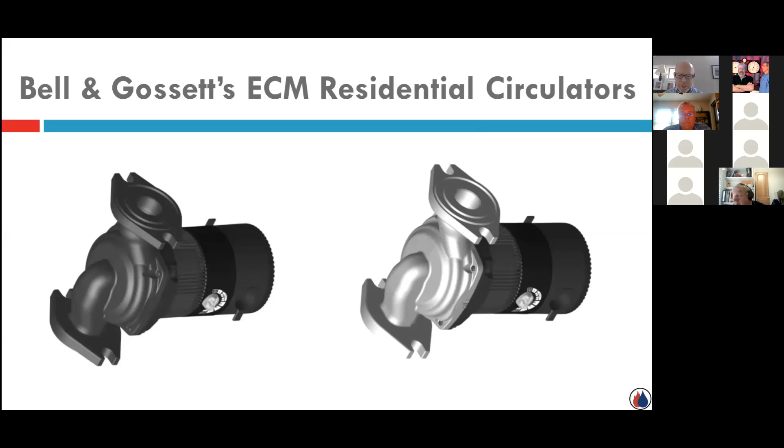ECM, why? Picture of B&Gs, little residential circulators, both cast iron and stainless steel, for domestic hot water or hydronics applications. They also have a family of commercial circulators, both single phase, and they actually introduced, I think they're the only manufacturer right now in the market that offers a 3-phase model of ECM pumping for their light commercial or commercial circulators.

So a quick question, why high efficiency? What's the reason? What's wrong with this? This was a typical residential home for a long time, all throughout the country, specifically up here in the Northeast, New England, New York, New Jersey, etc. 2, 3, 4 zones, 2, 3, 4 zone pumps, 3-piece, old B&Gs, probably looks like maybe an atmospheric gas boiler.

And that's what we did for a long time, and everything worked. Relatively speaking, it worked. Now, was it the most efficient way of doing it? Absolutely not. But for years, that question was never asked.

But efficiency and energy usage and energy costs have all moved onto the radar screen over the last few years, probably even more so when you think about condensing boilers. It's probably been 10, 15 years. The industry's changed, and it's looking to heat the water as efficiently as possible.

And then the next question became, are we circulating? Are we distributing that heated water that we heated efficiently? Are we circulating it as efficiently as possible? And when you get into the details, clearly not. That was okay for years, but now the focus is on high efficiency.

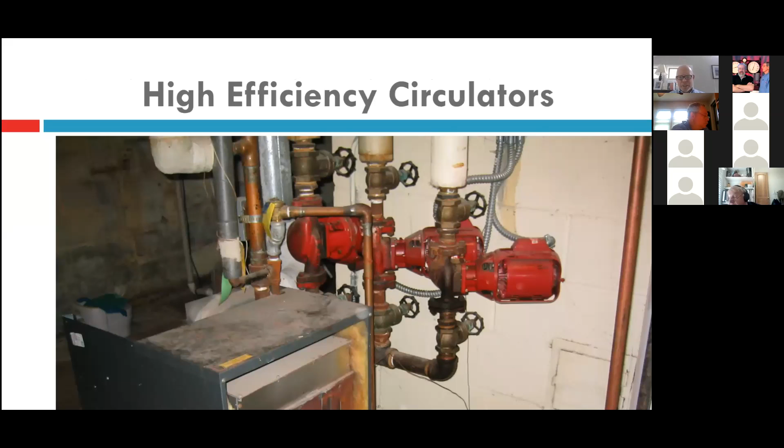Where does it come from? Well, a lot of the things that happen in the hydronics industry seem to originate from Europe. An interesting factoid: residentially speaking, over in Europe, they heat their homes about 98% hydronically. They'll have a boiler of some source, and even those boilers are starting to move to an air-to-water heat pump, but they're using hydronics. They totally believe in using water as the method of delivering energy from the heat source out to the terminal units, out where the people are.

Almost 15 years ago now, the pump manufacturers in Europe got together and asked, are we doing as good a job as we could, efficiency-wise, in terms of what's sometimes called wire-to-water efficiency? How much electricity am I using, and how effectively am I using it to circulate and deliver the water out to the terminal units? They voluntarily started this, but they knew legislation was coming from the European Commission that was going to increase the efficiency standards of these circulators.

So they created this thing called an EEI, Energy Efficiency Index, and rated the various classes. They created an alphabet scale, A through G, as shown here, and they were trying to get into this A, or A asterisk, or even A double asterisk. They started this a while back, so they've been using it for quite a while. If you look at an ECM circulator compared to, say, a water lubricated PSC, a permanent split capacitor, wet rotor pump that we've been using for the last 35, maybe 40 years...

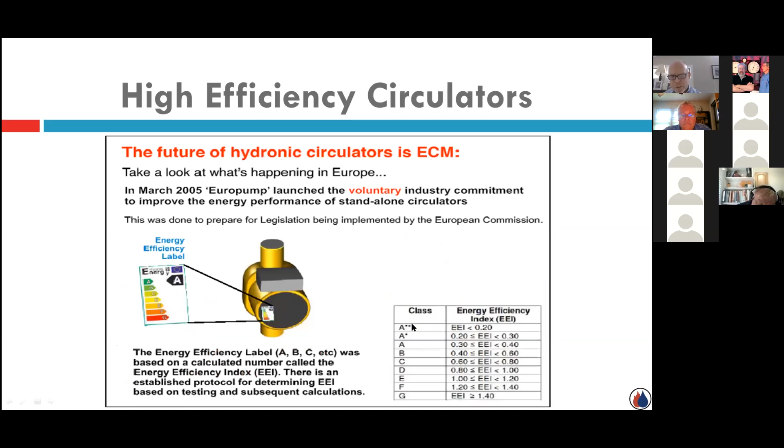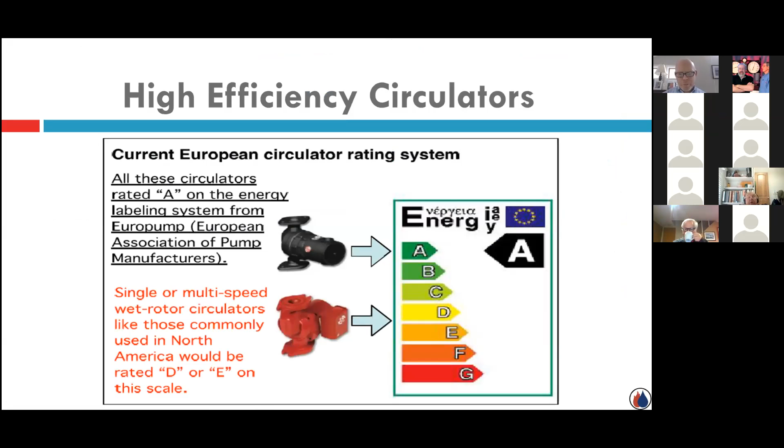They created these requirements, and right around 5 years ago, from August of 2015, this technology, the water lubricated permanent split capacitor, became illegal. They can no longer use those circulators in Europe. They have to be an ECM circulator.

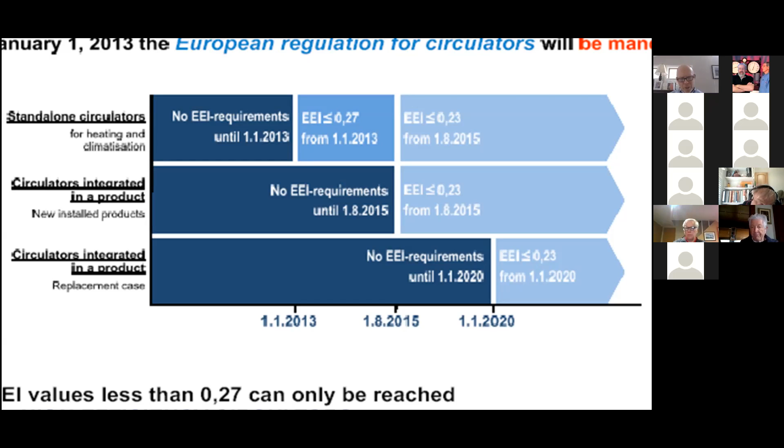So that's been going on for a while over there. Those ECM pumps have made their way across to North America, specifically up here in the Northeast, where hydronics is predominant. Back to that stat about Europe and 98%, in the United States I ask that question a lot at these presentations - we're about 93% air and 7% hydronics across the whole country. It's very little hydronics, mostly located up in New England, New York, New Jersey. A lot of boiler manufacturers refer to this section as Hydronics Alley, because that's where all the boilers and circulators are shipped.

So enough about Europe - what about America, what's happening here? For the first time ever, the Department of Energy is looking at creating efficiency standards for commercial, and eventually, though mainly commercial at the moment, it'll reach down into the residential market space - pump efficiency standards. They created a study - the Energy Efficiency and Renewable Energy Office has the standards for circulator pumps. I think they started at 2 horsepower and higher. All the pump manufacturers in the United States now have to qualify or meet a certain efficiency standard. Eventually I think they'll do a second look and start getting into the fractional horsepower range, but initially it started at 2 horsepower and up. That's brand new - prior to that, it never happened in the United States.

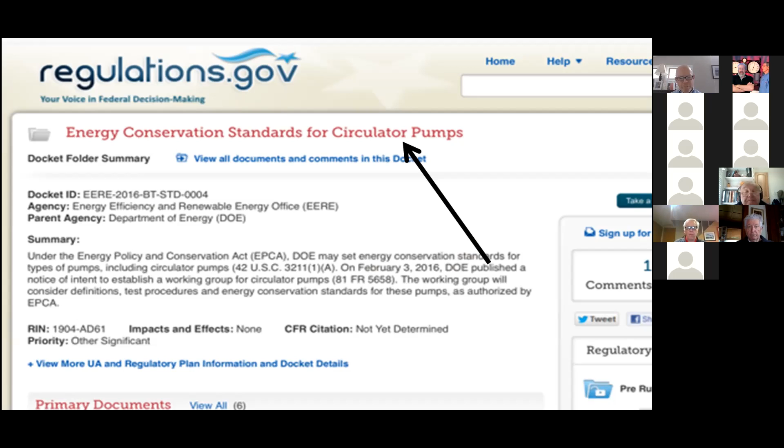I've had the Hydraulic Institute, which was kind of a third-party check for the various manufacturers - they'd say, hey, my circulator can do this, and publish a pump curve, and the Hydraulic Institute would third-party check it to confirm it meets that condition at a BEP, a best efficiency point, of 82%, 83%, whatever the number was. But there was never anything from the government saying, hey, pump manufacturer, you have to make a pump that meets this standard. That's now starting to happen.

The interesting thing, especially from the residential market space, and it's going to start transitioning into the commercial or light commercial space, is the utilities are very interested in this. They see the value in this ECM technology and the reduction in kW consumption.

All through New England, Mass Save, which covers Massachusetts and Rhode Island, has an upstream incentive program that takes place right at the wholesaler's counter, where if you decide to purchase an ECM circulator versus a more traditional wet rotor, they'll take $100 right off the price of that circulator. So the utilities are recognizing this high efficiency circulator comes with some technology, some expense, and we're going to incentivize and rebate that so we can get that technology out into the market space.

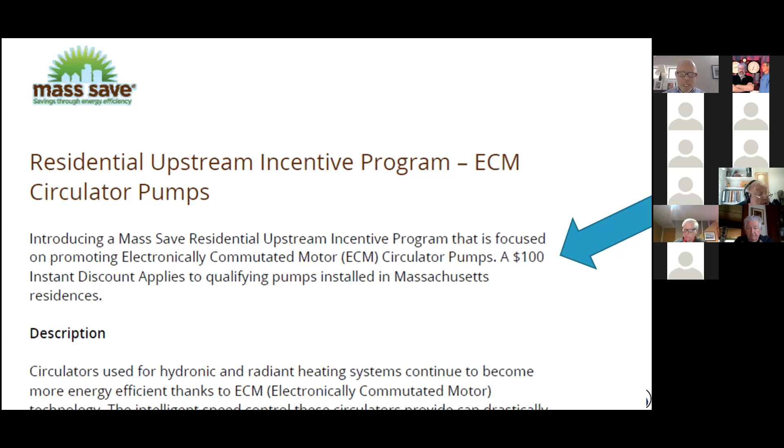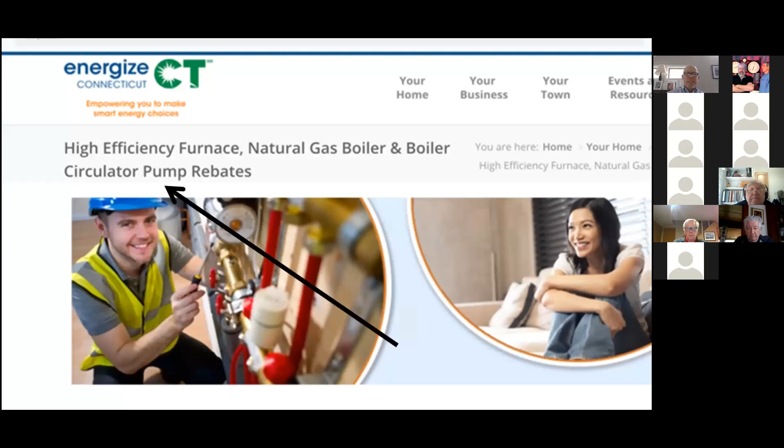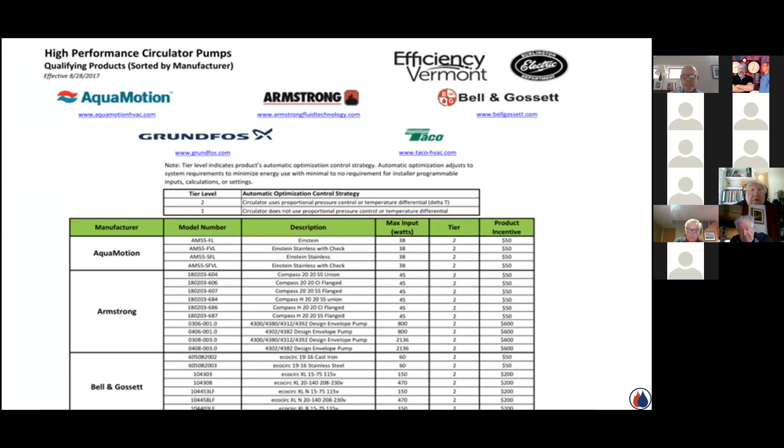New Hampshire has jumped on board - they have a New Hampshire SAVE program. Connecticut has Energize Connecticut, with an efficiency circulator rebate program. Vermont, through Efficiency Vermont, who was first to get involved, offers a program with different incentives to the various manufacturers.

So you say, okay, why? What's so different about these pumps? What's different about an ECM pump versus a more traditional induction motor pump? From the motor end, that's where we kind of have to start with ECM.

On a traditional induction motor, which we've been using for probably the last 70, 80, maybe 90 years, electric current flowing in the rotor is induced by the alternating current flowing in the stator. The speed of that rotor must be less than the speed of the rotating magnetic field in the stator for induction to occur, hence the name induction motor. This ratio of the two speeds is called slip. When you move to ECM, what ECM stands for is Electronically Commutated Motor.

So obviously much easier to just say ECM. But what's happening is on the rotor, they actually have magnets attached to it, permanent magnets on the rotor. That's very different from induction motors. Stator coils generate a rotating field, and the magnet just reacts to this magnetic field, causing rotation of the rotor.

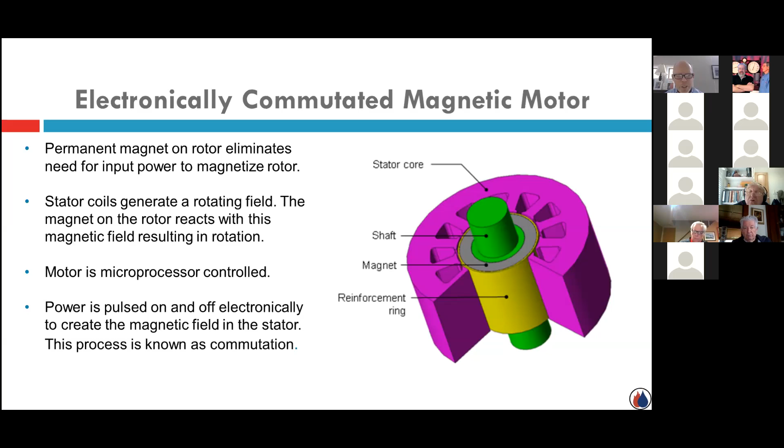But this technology now incorporates that microprocessor. So at the end of the day, power is pulsed on and off electronically to create that magnetic field in the stator. And this process is known as commutation. So, electronically commutated magnetic motor.

So the faster the microprocessor pulses that electricity, that power on and off, the faster the impeller and rotor spin, and the slower it pulses, the slower it spins. It reduces its RPM, its flow rate. And more importantly, what's got the utilities' attention is as you're doing speed control, you're reducing the kW consumption.

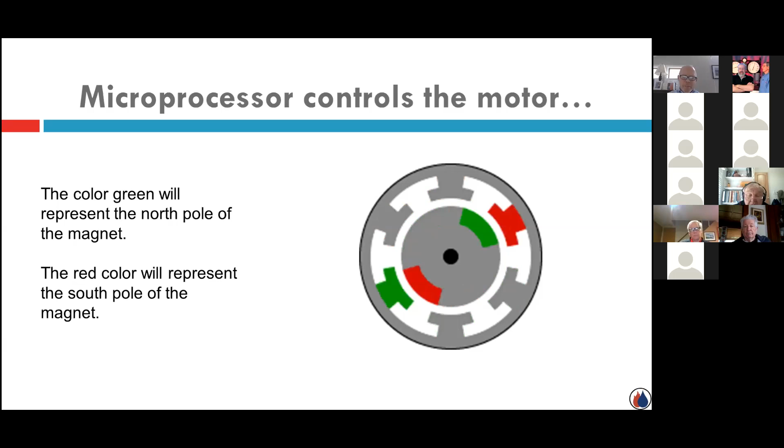And so that's what, over in Europe, what they were chasing after, what the utilities see the value in, bringing this technology over here to the Northeast. And that's why they've heavily invested in creating these incentives.

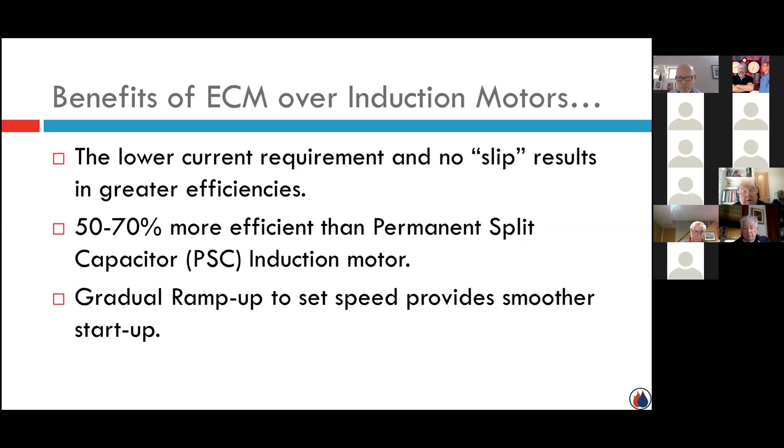So lower current requirement, no slip, results in greater efficiencies, depending upon different studies and what have you, 50 to 70% more efficient perhaps than a permanent split capacitor, PSC, induction motor. When the pump turns on, there's a gradual ramp up to set speed, so it provides a smoother startup.

So from the wet end, not a big difference. We have a volute here. We've talked about this over different classes we've been conducting over the past weeks. I have water moving into the eye of the impeller. The impeller's rotating, and the water flows along the vanes and gets flung out the discharge portion or opening of that wet end of the pump, the volute.

Same thing holds true with this ECM circulator. Of course, the difference is I'm going to have magnets on board that rotor, which is different. And then I'm going to have intelligence, a microprocessor, a PCB, a printed circuit board. Every one of these ECMs has some type of intelligence on board that can influence the operation of how the circulator works.

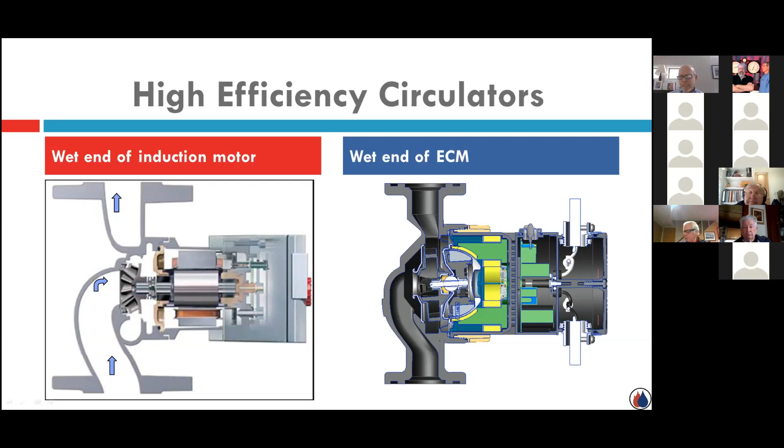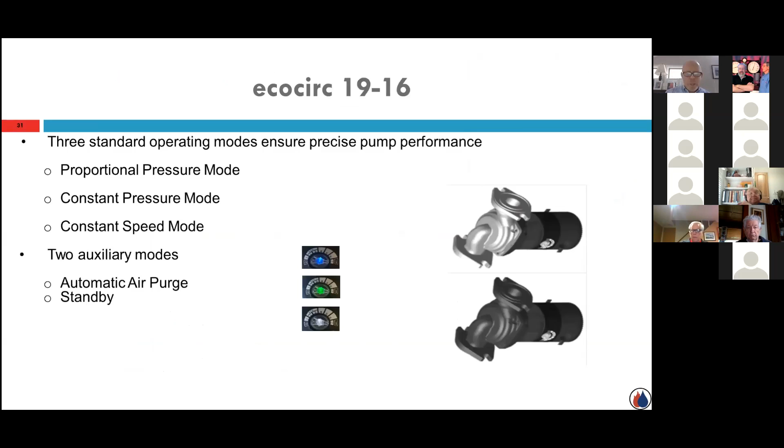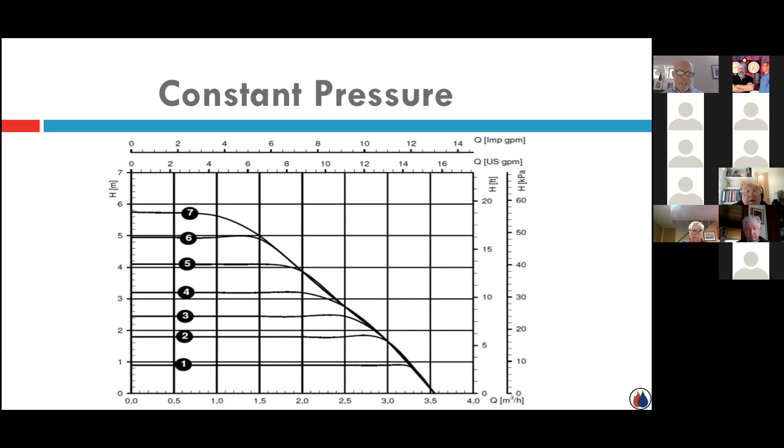Another mode that they offer is called constant pressure. So at any flow rate, they're offering somewhat of a constant pressure. To be quite honest with you, I don't know how many applications this actually applies to, but it's a mode that they offer within that onboard printed circuit board.

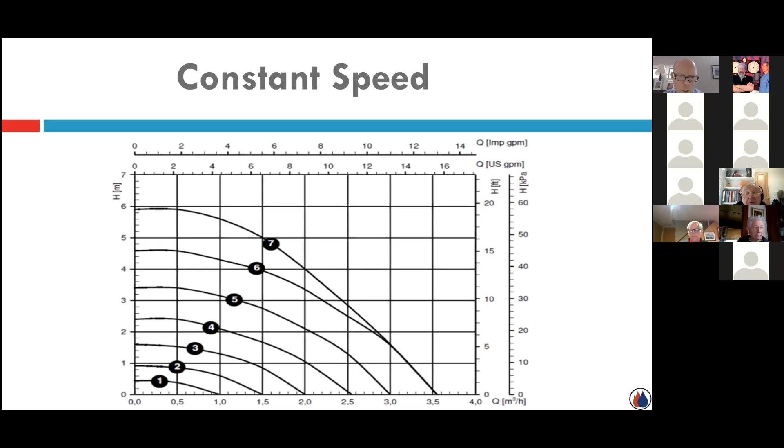Constant speed. We'll spend a little bit of time on this. This is a very popular application that we're using over here in New England and in the Northeast. So the two real popular ones are proportional pressure and constant speed. And we'll get into why.

On constant speed, what they're referring to is ideally suited for zone pumping. A lot of times over here, especially in New England and the Northeast, we might have a residential home that has 2, 3, 4, 5 zones, whatever the number is, and we're going to have the corresponding 2, 3, 4, 5 circulators responsible for providing heat for those specific zones. So the beauty of this ECM in this application is I can actually dial in what I need for flow and head, and in doing so, reduce the consumption of electricity. We'll go through a couple of examples as we go through this presentation this morning.

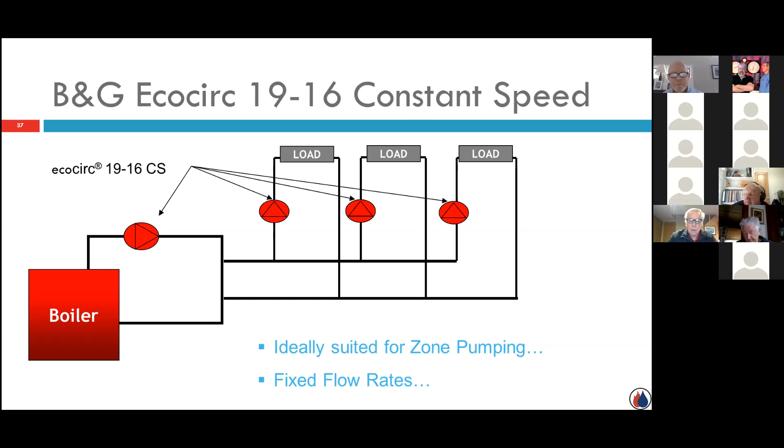Someone had gone out to a wholesaler and purchased X number of ECM pumps, received that rebate, that upstream incentive, and replaced the existing permanent split capacitor pumps with these ECM circulators. And they're just zone pumping, going very specifically, no zone valves, no control valves, just a thermostat through a relay box that pulls a pump on. I can dial in, and now I have speed control over this circulator, which I never had before.

This proportional pressure is an application where maybe I have one distribution pump, and then my zoning is through zone valves, and they could be electric or non-electric, either one. Over in Europe, this is a very common application, not so much with electric, but definitely with non-electric valves scattered throughout the home, controlling the output of typically panel radiators, and then they'll have one distribution pump.

And the point of this proportional pressure is as these zone valves open and close, it changes the requirements of the system, and the pump has the intelligence on board to recognize that change and either speed up or, more importantly, sometimes slow down as the valves start to close, and in doing so, consume less energy. So it's ideally suited as a primary pump when zoning with zone valves.

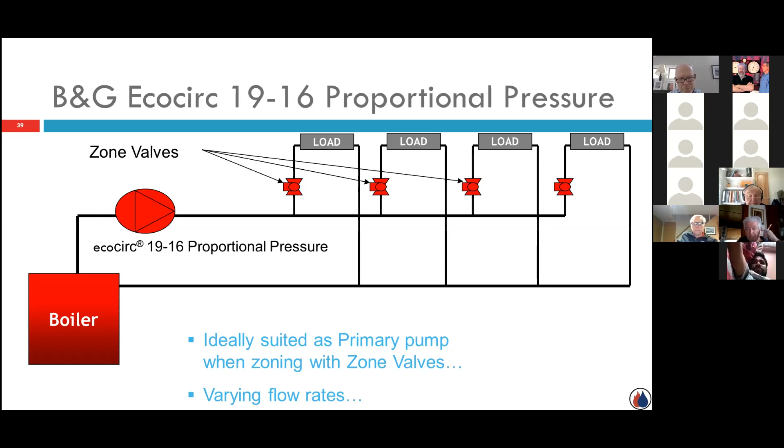So what we're trying to show here is an example of a 4-zone home. Here's the mechanical, 1 pump, 4 zone valves, feeding maybe baseboard. In this particular case, the contractor said, I'm looking at full flow, probably around 9 gallons a minute when all 4 zones are calling. And the point of this is, as the zones start to close, instead of backing up on the curve, which is what I would traditionally do with the circulators we've been using for the last 50, 60, 70 years, and in doing so, continue to consume more energy than needed.

At some point, as I back up and develop some excess pressure differential, some excess head, I could actually create some velocity noises sometimes.

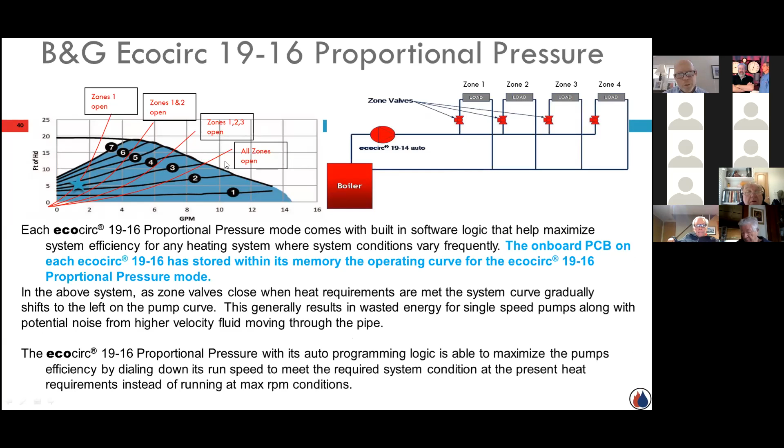So real quickly, on this example, some contractor perhaps set it on dial 3, saying, I'm looking for this kind of flow rate on design conditions when all 4 zones are open. So the control says, okay, I'm on dial 3, so I know the curve.

I know in my memory exactly where I need to be, based on wattage and RPM speed. So the control says, this is what I'm set for. Is there a difference? Is there an error? And if there is, the pump speed should be increased or decreased automatically accordingly.

And it's almost instantaneous. You really can't see it happening. It happens so fast. It's a computer on board telling the pump where to be.

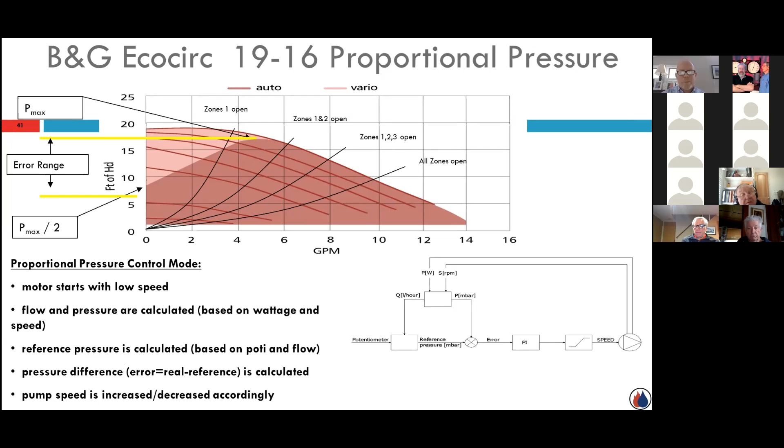So this is the potentiometer, the dial I was referring to. It sits right here, and you make that adjustment, respective to the particular zone or application you're putting that circulator in.

And once it's set to a particular dial, and you've told it you're going to be running in proportional pressure, it knows where it's supposed to be all the time. So as conditions change and the pump starts to speed up or slow down, it says, I'm not on my curve that I'm supposed to be on, and I'll respond accordingly.

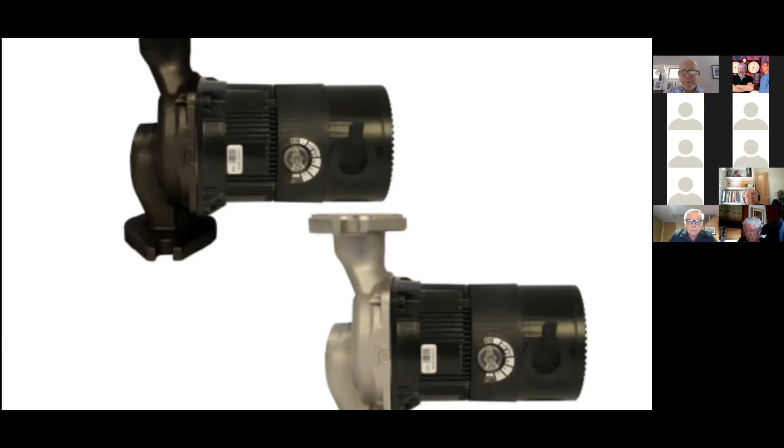So I want to spend just a couple minutes here, real quickly, on how this can be applied and why this got the utilities' attention - how to apply flow and head information to existing systems.

We have a lot of installed hydronic systems up here in New England and in the Northeast, and a lot of times we do zone pumping. So I just want to take you through a couple quick examples of how you could take advantage of this technology, this ECM with this dial right here.

And then I think some of you might be familiar with this wheel, this calculator, the system sizer. We did a class a couple weeks ago, and we've got another class coming up in a week or so on the system sizer. So I want to combine the capabilities of this tool and how you can use it to take advantage of the efficiency that comes with this circulator.

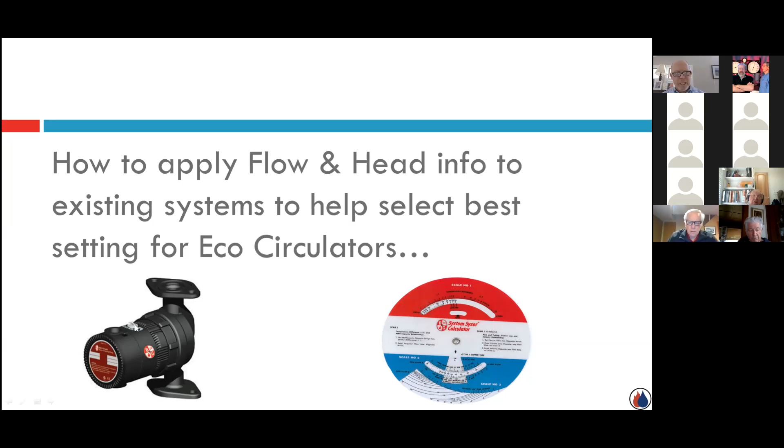So, quick example. I have multiple zones in a home, but I'm just highlighting one particular zone for example. In that zone, I've got 30 feet of 3/4 inch copper baseboard.

Now, I'm not sitting here doing a heat loss calculation, which is what I really should be doing, but I'm going to say, at the worst case scenario, I've got 30 feet of 3/4 inch. How many BTUs does this represent for that particular zone?

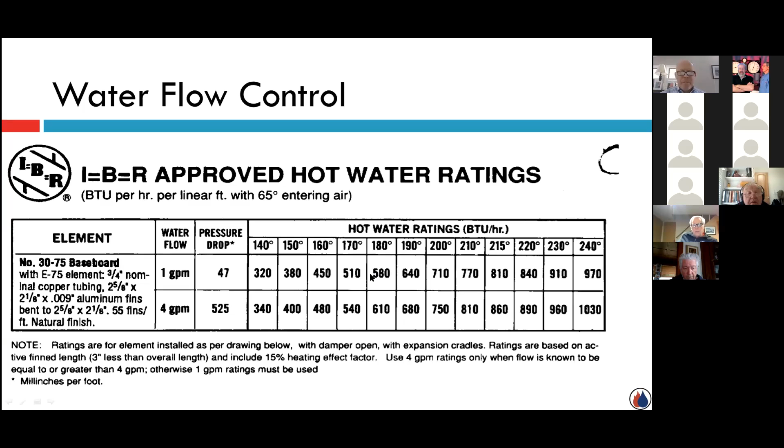What you do is go to any baseboard manufacturer's literature and say, okay, standard water temperature, typically 180 degrees. Whatever my flow rate is, say 580 BTUs per linear foot of board.

And I have an application where I have 30 feet of it. So I'm just going to do a math equation: 30 feet times 580 represents 17,400 BTUs an hour. So in that one particular zone, that's the maximum BTUs I'm going to transfer into that space.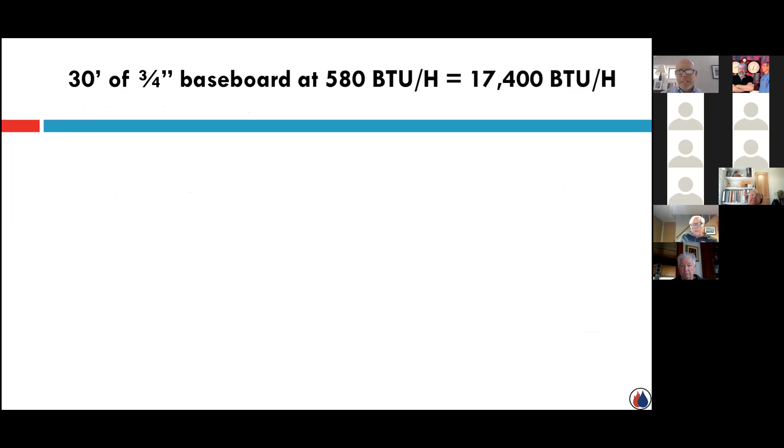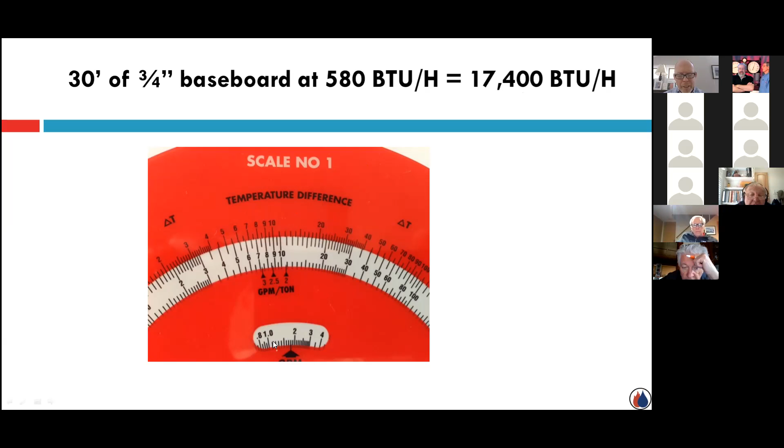So then the question becomes, as a circulator, what does that mean in flow rate? How many gallons a minute is that? That's where I could take advantage of the System Syzer calculator and say, I have a load of 17,400 BTUs. Almost all residential systems are designed on this 20 degree delta T, temperature difference. So when I line up that 17,400, I look down here in the small window and it says GPM. So I'm really pumping like 1.7, 1.8 gallons a minute to transfer 17,400 BTUs.

So then the next part of the equation is, now I know my flow rate, when I pick a circulator, what's the pressure drop? What's my frictional resistance in that zone that I need to overcome to provide that flow rate? In this example, what's the pressure drop of 100 feet of 3/4 inch pipe with a flow rate of 1.74 gallons a minute circulating through it?

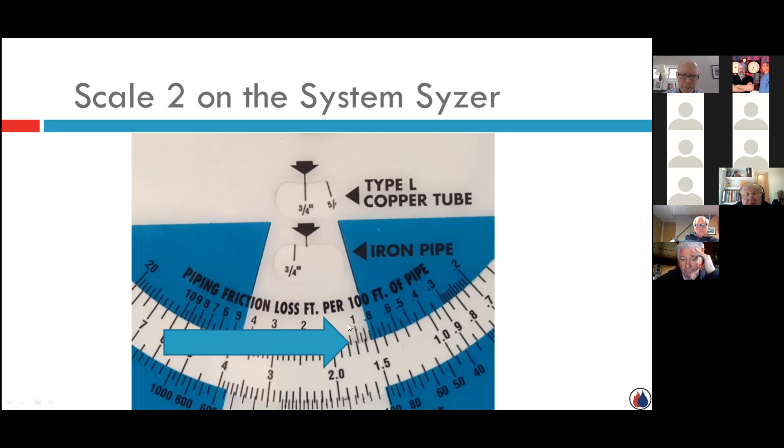Again, System Syzer, now I move to scale 2, and scale 2 is all about pressure drop and pipe size. I say, it's an existing system, I know I have 3/4 inch copper pipe that I'm flowing through, and I know my load is 1.7, 1.8 gallons a minute. What's the pressure drop? Here's my 1.5 gallons a minute, here's my 2.0 gallons a minute, so I'm right around 1.8 gallons a minute. And the pressure drop is a little over 1 foot for every 100 feet of pipe.

So then you say, what's the total pressure drop? What you have to account for when figuring out the total length of a circuit is you've got to include fittings. A rule of thumb we've used in the industry forever, instead of trying to figure out how many fittings are installed, is just take the 50% rule. Whatever the length of run of that zone is, add 50%, and that will account for your T's, your elbows, etc.

So if my total length, my total TEL, is 150 feet, and I'm lined up opposite my pressure drop of about 1 foot, at 150 feet my total pressure drop for that circuit is about 1.5 feet of head. So then you say, what does this all mean?

Let's go back to the pump curve and say, here's my Eco 1916 curve. I have a flow rate of 1.74 gallons a minute I'm looking for. In that circuit, that 100-foot loop, add the fittings, it becomes a TEL of 150, I have a pressure drop of 1.5 feet. So when I look at that potentiometer, I have a dial that I can set, right over here on the right-hand side of the circulator. I can make an adjustment, I can dial that pump into that particular zone. So in this example, with 1.74 gallons a minute overcoming 1.5 feet of head, I can put it down to dial 1.

So then you start saying, what does it cost to run a zone pump? That's where the utilities come in with this incentive. Typically, little residential water lubricated PSC, permanent split capacitor - our version would be like an NRF22 or so - typically they consume around 85 to 90 watts anytime they turn on.

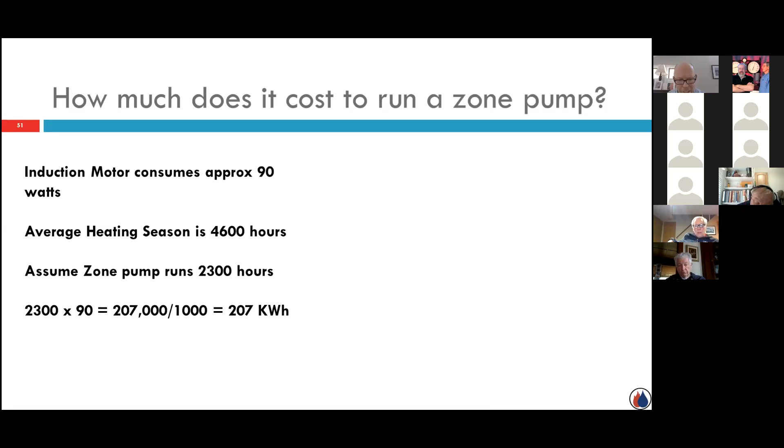So then you start plugging in some numbers. Average heating season here in the Boston area, which is where I based everything on, is about 4,600 hours. Assume a zone pump is running around 2,300 hours, half of that. So 2,300 hours times 90 watts, I'm consuming 207,000 watts. I want to figure out my kW consumption, so divided by 1,000, I'm using 207 kW per hour.

When I did this example, the cost per kilowatt was about 20 cents. I probably should update this because I'm sure it's a little more than that. But anyways, at the end of the day, when you do the math, to turn that circulator on, a traditional pump, which we've been doing for the last 40, 50 years, that pump's going to consume about $41.40.

Now all of a sudden I replace it. I go to the wholesaler and I pick up a couple of replacement pumps. I take advantage of the rebate at the counter, and I'm going to put in an Eco 1916, consuming 5 watts, plug in the same numbers, do the math. I'm only consuming 11 kW per hour. So to run that pump for 2,300 hours out of the heating season, I'm consuming $2.30 as opposed to $41.40 on that one particular example.

And that's what's caught the utility's attention. That's what's driving it. They're very interested in this.

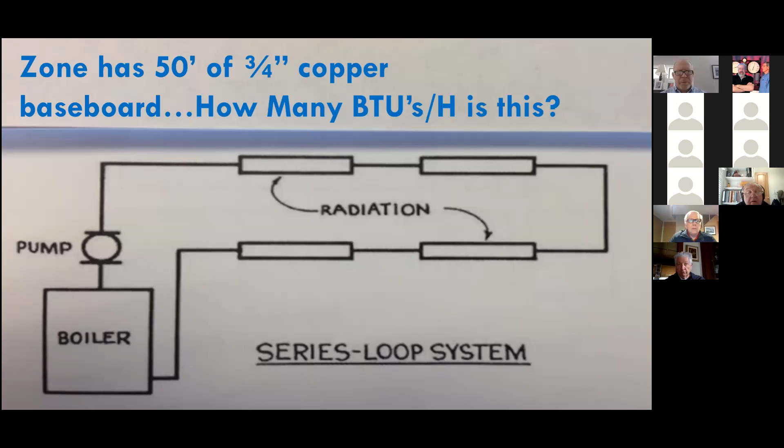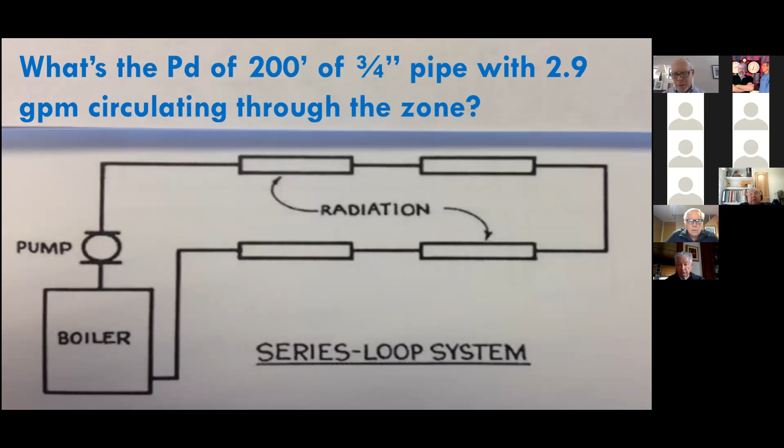Just one quick example, I'll fly through this. Someone says, you know, 30 feet's really not, that's kind of a small zone, make it bigger. So we said, okay, let's make it 50 feet. Times it by the 580, I got almost 3 gallons a minute, 2.9 gallons a minute, 30,000 BTUs. And the loop is 200 feet, not 100 feet. Do the math, use my System Syzer, do my calculation, overcoming about 8 feet of resistance at a flow rate of 3 gallons a minute through 3/4 inch pipe.

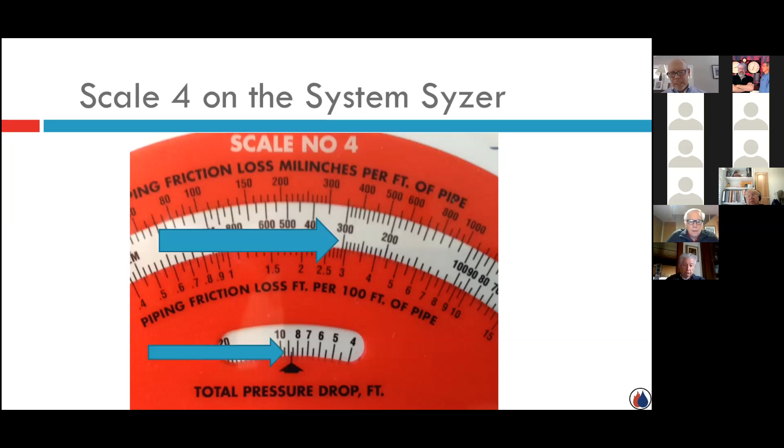So I apply it to the curve, the pump curve, and I say, okay, I'm trying to pump 2.9 gallons a minute, and I need to overcome about 8.3 feet of resistance. So in this case, obviously dial 1, the potentiometer setting, that'd be way too low. It doesn't have the flow to overcome the resistance. But I find that I can set it at dial 4.

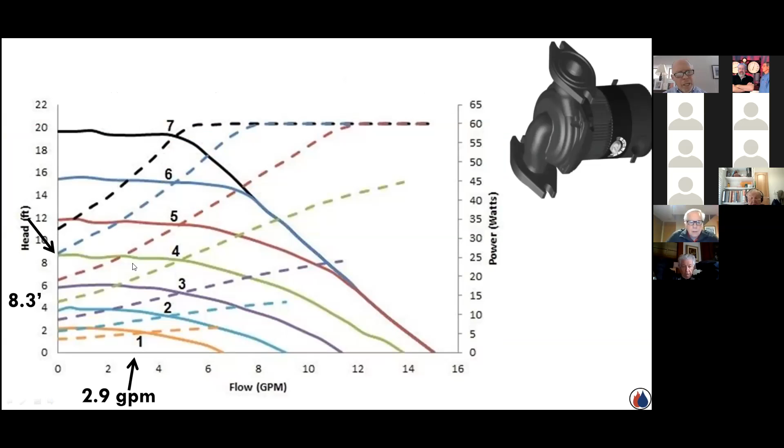So you say, okay, well, what's the energy, what's the wattage consumption? Well, it's about 20. 20 is significantly more than 5, but substantially less than the maximum here, which is 60. And what you were taking out is around 85, 90 watts. So it's still a savings.

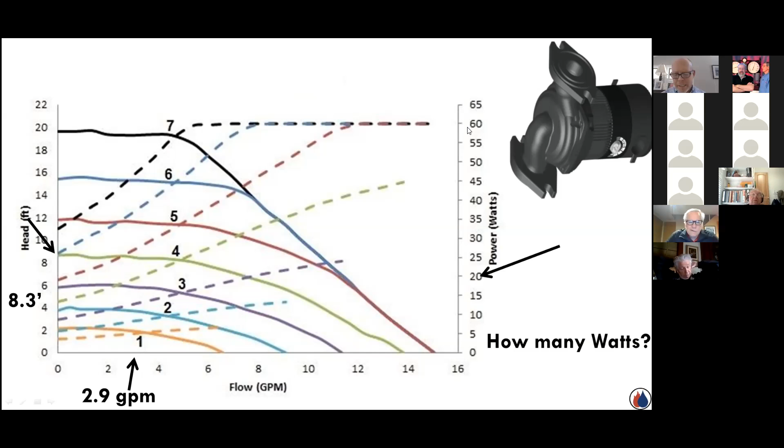You do the math, crunch the numbers. That particular zone with the 200 feet plus your fittings, so call it 300 feet, 8 feet of resistance, 3 gallons a minute, it's going to cost you about $9 a year, $9.20, if it's running for 2,300 hours, and the cost is 20 cents per kW. It might be a little bit more now.

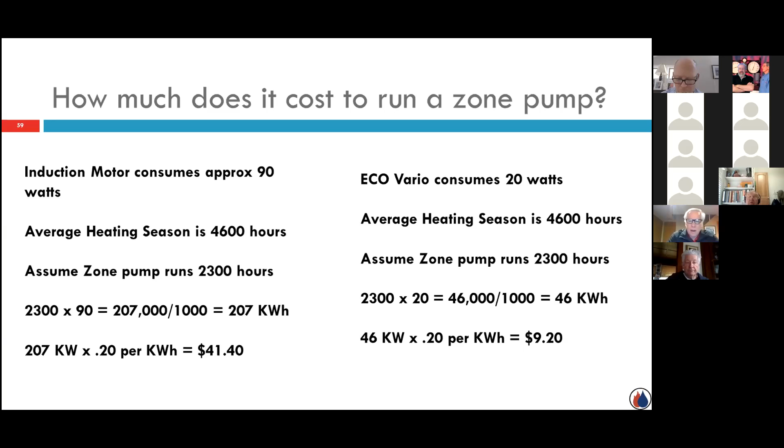But anyways, the point of it all is it's substantial. You can take advantage of this variable speed, that potentiometer, and really fit or set the circulator for the specific zone that it's being installed in, which we've never done before because we had no speed control on these residential circulators.

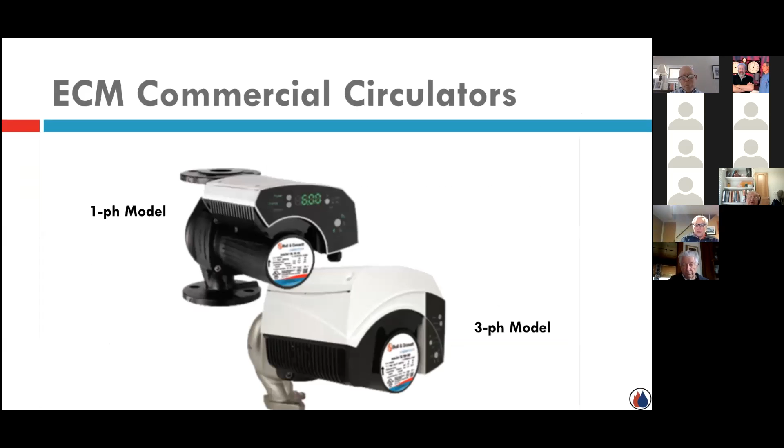Moving forward, same concept, it's just carrying forward to the commercial version, the ecocirc XLs, is what Bell & Gossett refers to. And again, like I mentioned at the beginning, they come in single-phase models and they also offer 3-phase models, with more capacity obviously. One interesting note, in their model number, it's kind of the first time Bell & Gossett's had a model number that represents the capacity of the pump. And what I mean by that is this.

When I look at this ecocirc XL, and it's 36-45, what it's referring to is at no flow, the maximum head this pump can develop is about 36 feet of head. And the 45 refers to the max flow, so with no pressure drop, I can move 45 gallons a minute. So in my mind, I can actually start to see the shape of that curve: 36, no flow; 45, max flow, no head. It's the first time B&G's had model numbers like this that represent or reflect the pump curve of the particular pump.

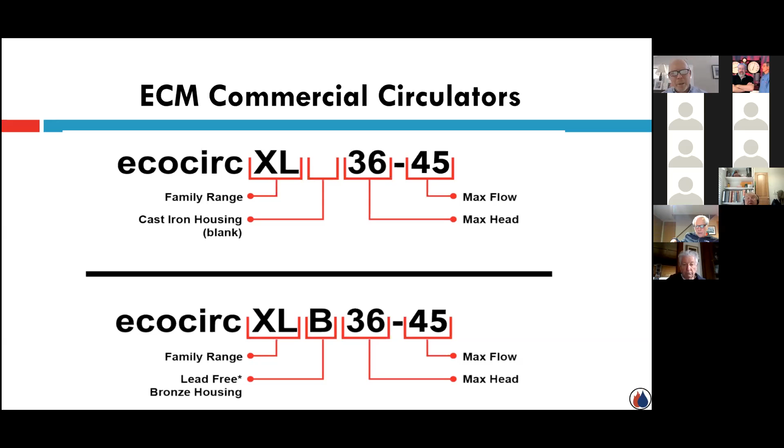So we kind of categorize these circulators, these ECM ecocirc XLs, into 2 categories. One's referred to as a high head model. It's moving GPM, flow rate, but it's overcoming feet of head, frictional resistance. These are what you refer to as some of the higher headed model numbers, and they're shown in both the three-phase and single-phase models. Some of them actually have the option of becoming either three-phase or single-phase, and that would be this 70-145. So you get some decent flow rate over here with these high-headed pumps.

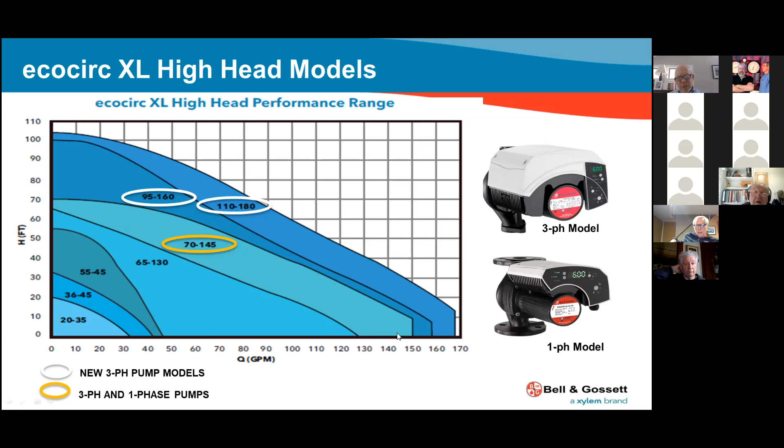What's happening is these drives that are on board, that's the intelligence—similar to what we talked about in the residential, but with even more capability, as well as some display features that reside on these commercial pumps.

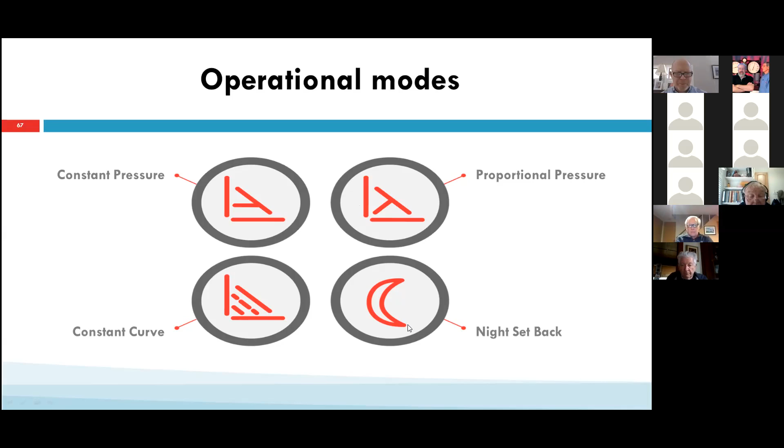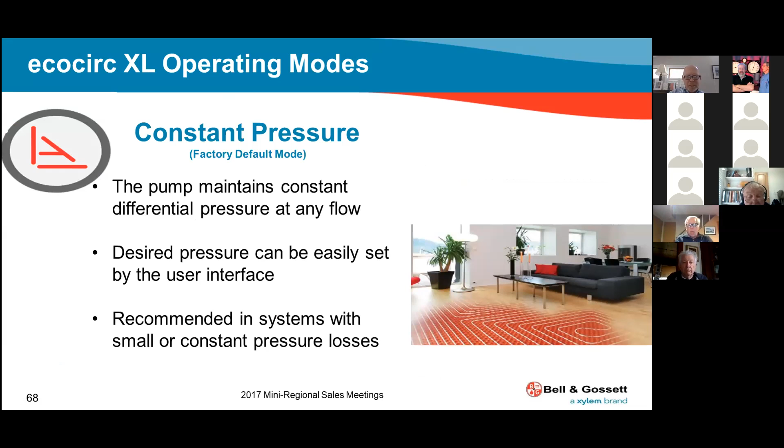Just like the residential, they come in constant pressure, proportional pressure, constant speed, or constant curve. They add this other feature, which they refer to as night setback. I don't know how many times it's taken advantage of, but you could operate any one of these three modes and incorporate night setback—it's an option, doesn't have to be used. The constant pressure, like I said earlier in the residential pumps, I don't know how applicable it is, but you could have some applications with smaller or constant pressure loss systems where you could use constant pressure.

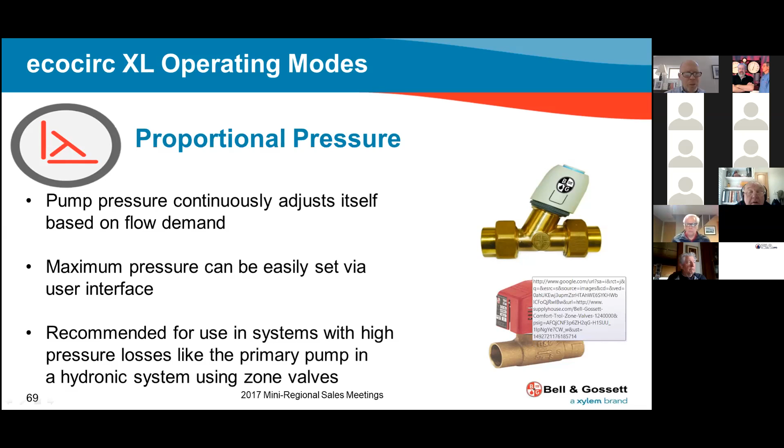This is a real big one—probably our most popular application, like we said earlier, in the residential: proportional pressure. Put it in an apartment building, multifamily unit, where you have X number of apartments or zones, and they all have their own thermostat and their own type of zone valve, either electric, like we're showing here, or maybe non-electric. That's a very popular application, and we see this quite a bit.

I don't need to go through this again, we've already done it. What I wanted to show you here is a quick example: proportional pressure on a 65-130. So maybe I've selected this particular pump, and I'm looking at somewhere around 750,000 BTUs—that's the load. So I'm looking for around 75 gallons a minute, and I have this proportional curve.

The way the manufacturers of these ECM pumps develop proportional pressure is they take whatever the design head loss is, your frictional resistance, and where they try to land the proportional curve is they take that head and divide it by 2. So whatever my design head is, I'm going to back down on this curve to basically about half of what I can develop at my design conditions.

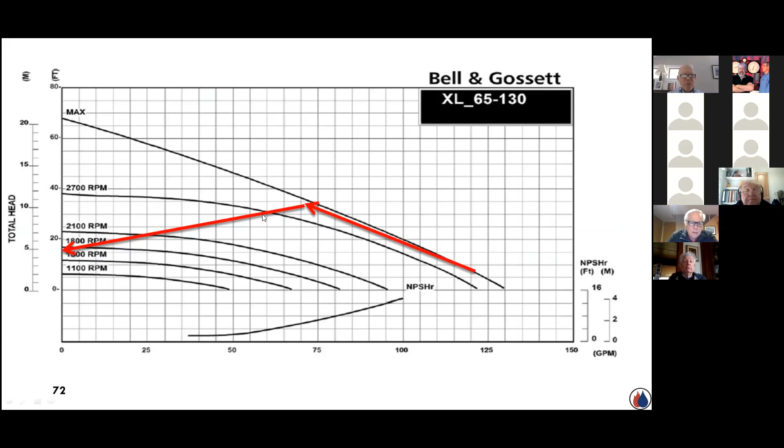So it's speed control—you can see the RPMs, we're just slicing through, cutting through these RPMs, and it's not a very steep curve on the speed control. So you're saying, how much benefit is that? When you apply it to the power consumption, the wattage, it's a very steep curve. I can go from consuming maybe 800 or so watts at maximum design flow, and drop that all the way down to as low as perhaps 200 to 225 watts.

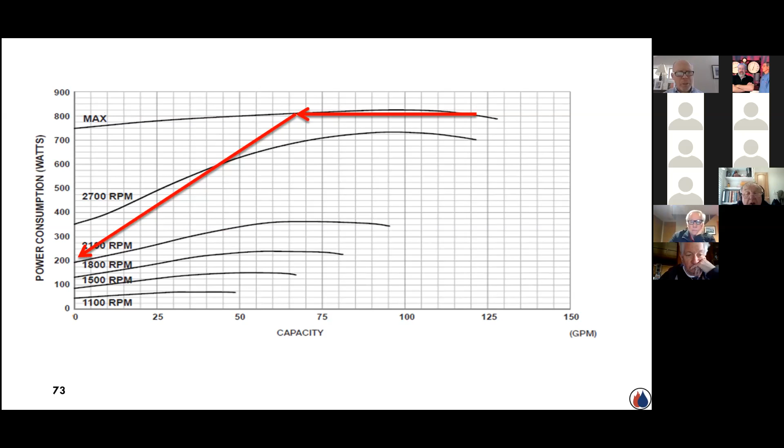So that's where the energy savings is. That's what this pump will do constantly as the zone valves upstairs continually open and close, responding to a thermostat call. Fixed speed—we've talked about that.

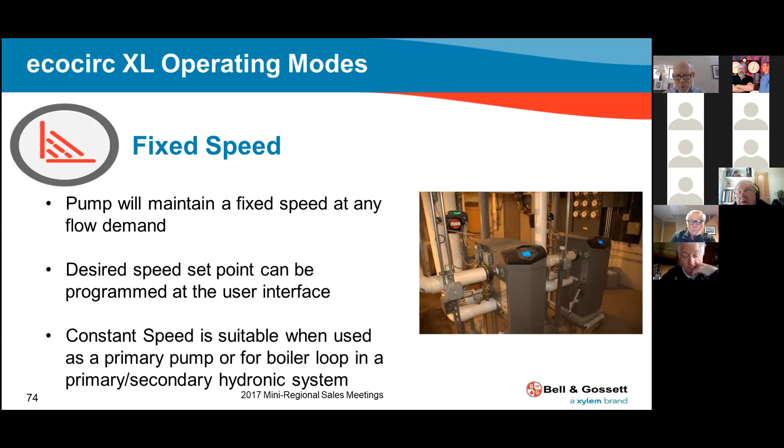This is an application where there's no zone valves—I'm just going to a very specific load, whether it be a fan coil, an air handler, or baseboard. In this example, this was an application for a multifamily unit, so they were using 2 pumps, one running and one 100% standby in proportional mode, feeding zone valves upstairs. Right beside it, they had another set of 2 pumps, and those were going to be in constant speed, feeding a bank of 2 or 3 indirects.

The ability of this pump to dial in the desired flow rate that the manufacturer of the indirect wants per coil—you could actually do that. So you could set it up as constant speed. You're saying, okay, buying an ECM pump is a little more expensive than a more traditional wet rotor, but you have other capabilities we're going to get into, where you can have these pumps talk to each other, rotate, and all of that.

So this is pretty common—we see this a lot in light commercial applications, where we'll do proportional pressure for the radiation upstairs through zone valves, and then for our indirect domestic hot water, it's constant speed. But we can actually dial it in so it's not consuming more than it needs to satisfy the design conditions of the coils inside these indirect water heaters.

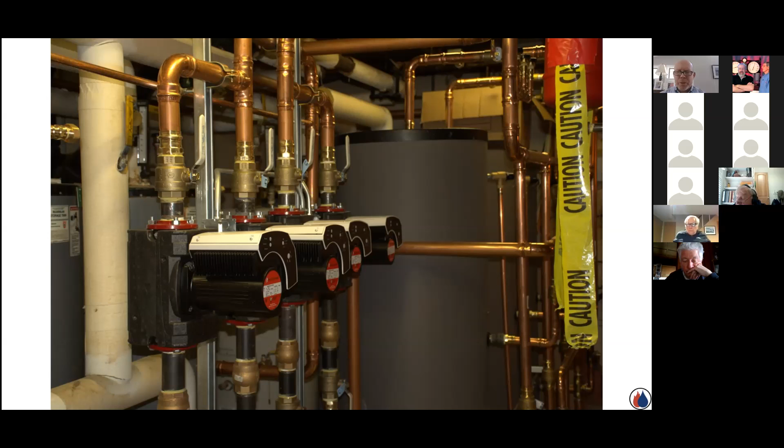Following up on parallel operating modes, we can have the pumps talk to each other. There's a cable that runs from one head to the other. One of these circulators becomes the leader, or master, and the other becomes a member, and they communicate back and forth.

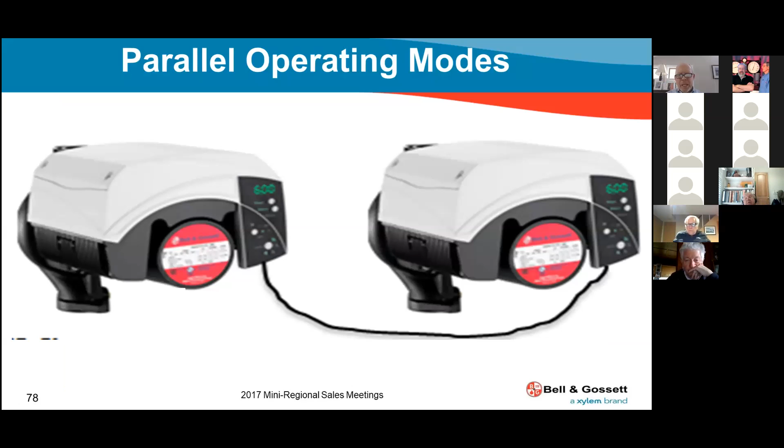They offer up to four modes of operation. I think two of them are very applicable, and two of them don't make as much sense. The first is backup: only the lead pump runs, and if the lead pump fails, the second pump starts. It's an option, but I don't think it's very applicable.

I think this one is more appropriate: alternate operation. You design it so one pump can handle the load, and it runs when there's a call, or maybe based on outdoor temperature running all the time. But they switch operations every 24 hours, so you get equal runtime on both circulators. The benefit is if the pump that's supposed to be running fails, the second pump can automatically start and pick up.

Here's another application of parallel pumping, where you take advantage of larger, high flow pumps and put them in parallel. You can cover a lot of ground, getting into 4 or 5 million BTUs, 400, 500, even 600 gallons a minute. The piping would be sized for that total flow, and you'd pick two pumps that could each provide half of that flow at the design head loss, running them in parallel.

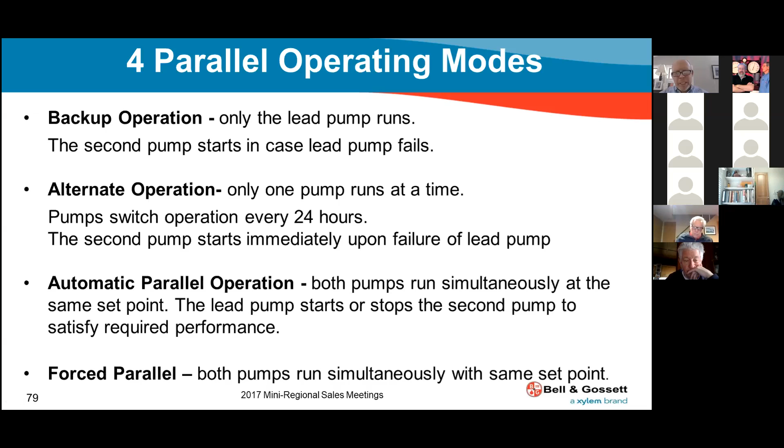So I think the parallel modes are right here: either having 100% operation where I just rotate my lead and lag, or if I do a little engineering and pick two smaller pumps that together give me my desired flow rate, with a bit of intelligence on board.

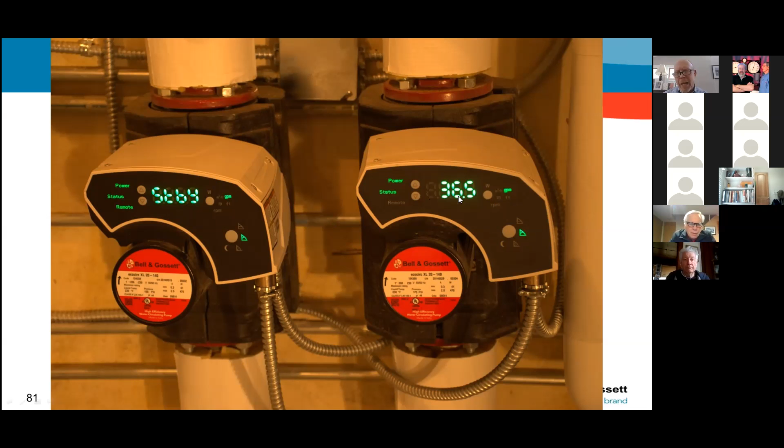That's the icon for proportional pressure, used here because it's feeding a multifamily home upstairs with apartments that have their own thermostats and zone valves. Over here, this pump is in standby. So if you came back the next day, this pump would be running and the other would display standby. It just rotates back and forth.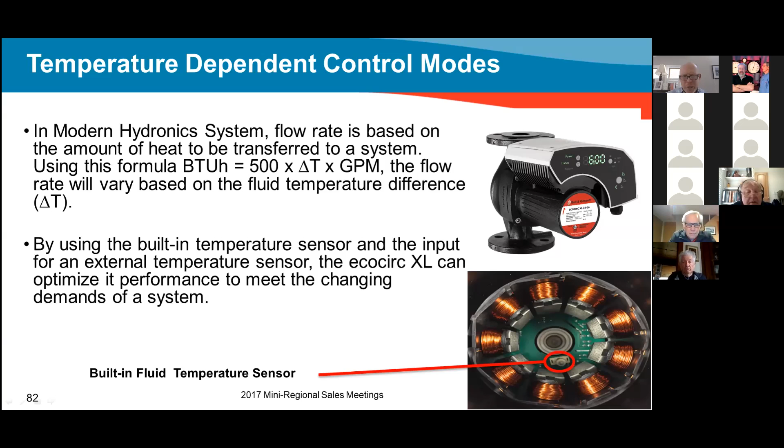Another option for these circulators is temperature control. Behind the impeller in the volute, there's a built-in fluid temperature sensor. I could add an external temperature sensor, perhaps on the return, and do a delta T, a temperature difference. I could dial into the pump and say maintain 20 degrees on this loop, whatever that loop happens to be. Looking at the supply, where the pump's built-in sensor typically sits, and comparing it to the return temperature, I could influence the pump's speed and operation based on the delta T.

One other application I just want to point out that's available with these ecocirc XLs is they have the ability to receive an input, a 0 to 10 or 4 to 20 milliamp input, to influence the speed of that pump.

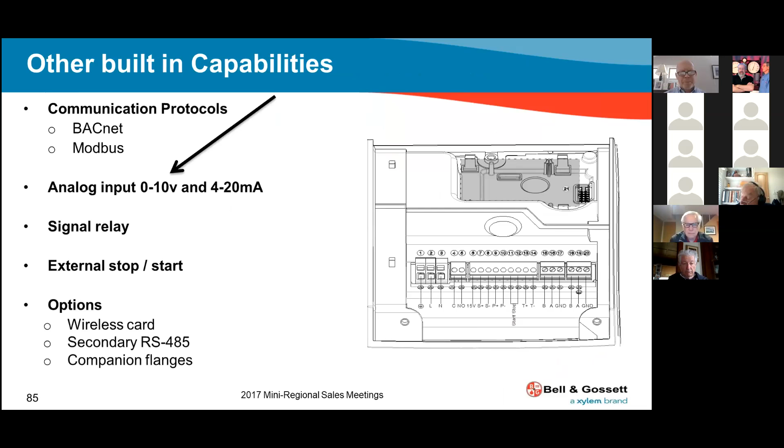Where we're taking advantage of it is we're combining technologies available through Lochinvar on their smart control, where they can provide a 0 to 10 output, and then we marry it or match it with an ecocirc XL that can receive that signal and vary its speed based on the information or power signal being provided by the boiler. And the boiler is looking at what's happening on board the boiler.

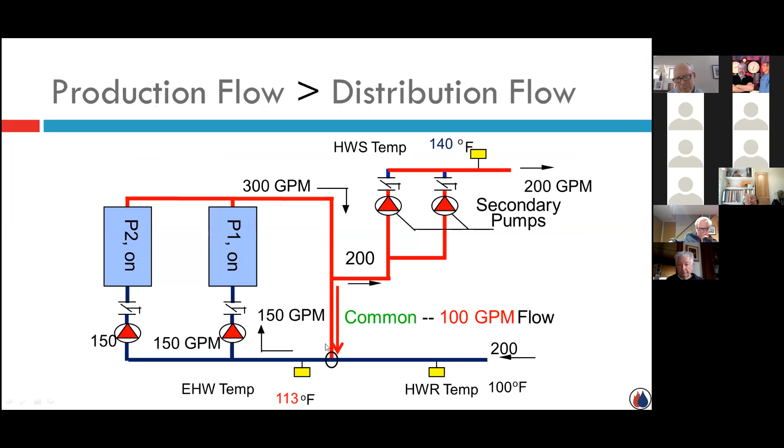If you start to take that 100 and elevate it, and the reason we're elevating it is we're over pumping that common pipe. We're going backwards. We're taking some hot boiler water and dumping it into the return. I can start to lower the efficiency of that plant. So we try to avoid that when possible.

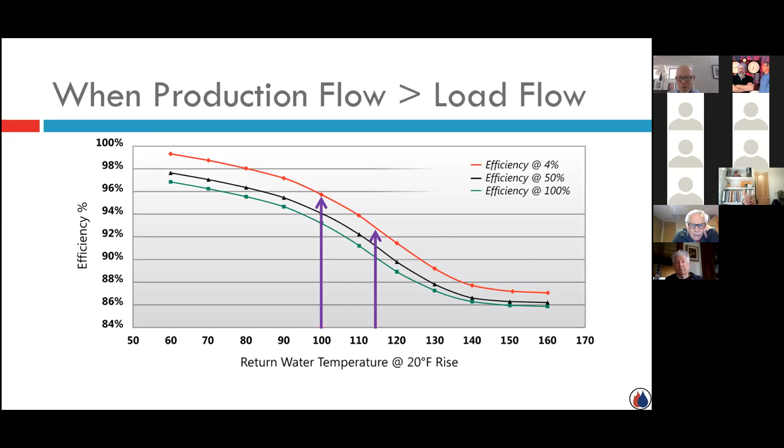And now that this ECM technology is available and it's out there, and it has that ability to receive this external signal from the boiler control, you can kind of eliminate that from being a problem.

So what I'm showing here is, say, a 500,000 input condensing boiler with a fixed flow. As the boiler modulates—and why would it modulate? Because the load on the building is constantly changing, rarely at design conditions—I'm going to vary my firing rate. When I do that with a fixed speed pump, look what happens to my delta T across this heat exchanger: my inlet and outlet get very, very tight. That can lead to short cycling of that boiler or boiler plant.

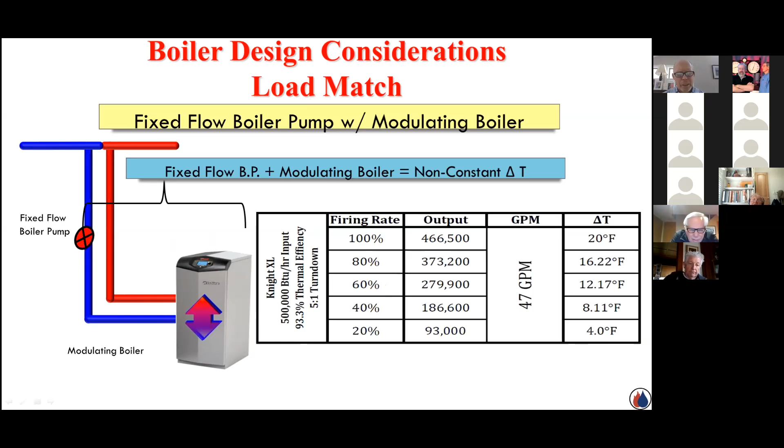If I incorporate an ECM circulator that can take a 0 to 10 signal, I can vary the speed of the pump. What dictates that varying speed is my inlet sensor and outlet sensor. I set a particular delta T—maybe 20 degrees across the heat exchanger. As the control varies the signal, which influences the speed, I'll change my GPM as the boiler's firing rate changes to maintain that set delta T. It does a great job of eliminating or minimizing short cycling of this technology, which is a positive.

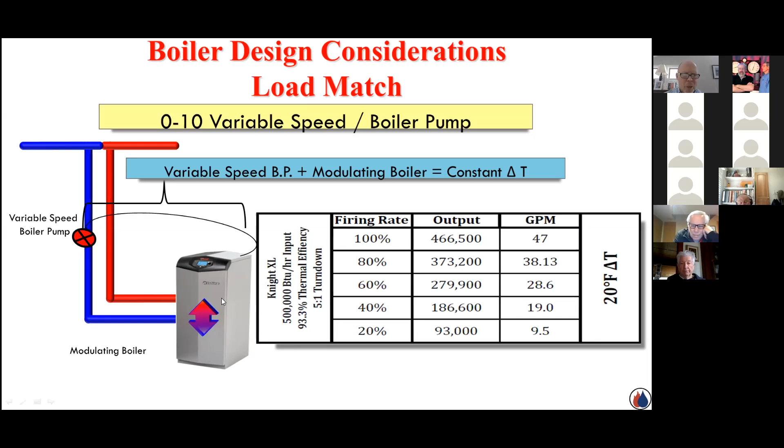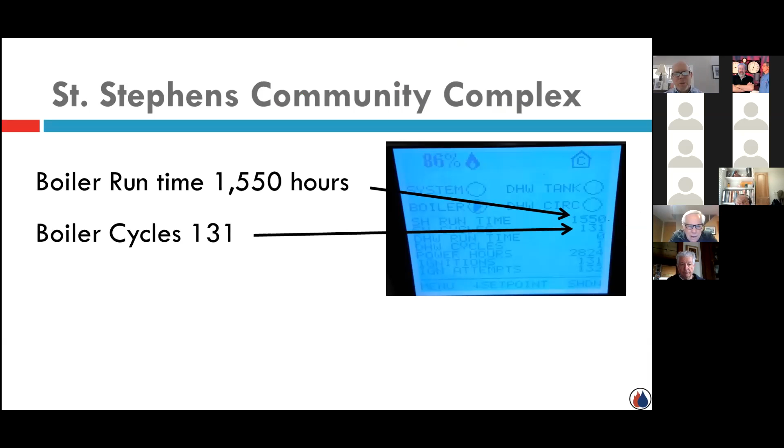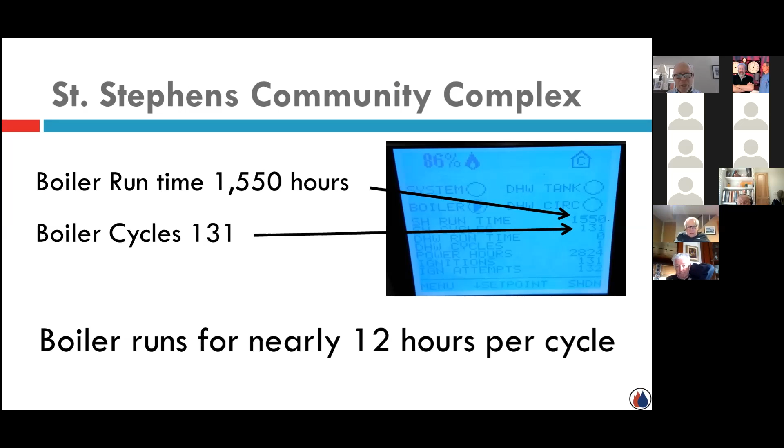We had a system out in the field—a couple of screenshots from St. Stephen's Community Complex. Space heating runtime was 1,550 hours, and space heating cycles was 131. When you do the math, the boiler was actually running for almost 12 hours per cycle, which is very effective. We had multiple boilers, each with a variable speed pump, an Ecocirc that could receive a 0 to 10 signal, so you could really fine tune the production of that heat source, that boiler plant, and run it very efficiently.

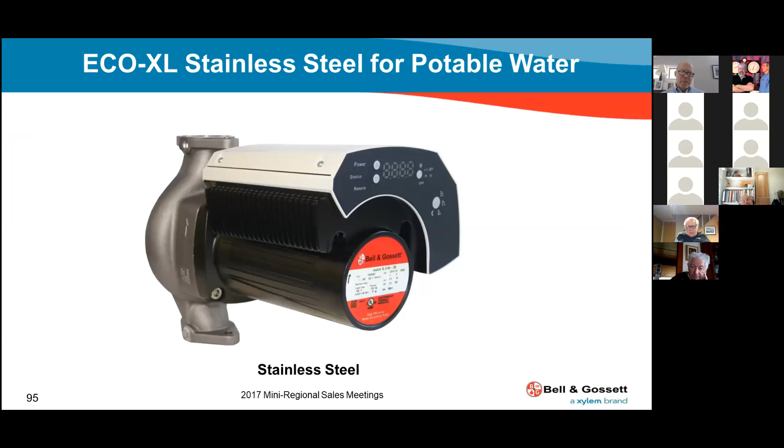That's the last thing I want to mention about ECM with these larger light commercial pumps—they also come in stainless steel, so from a potable water, possible recirc in apartment buildings standpoint, we've entered into that arena as well with these circulators, and they do a nice job.

One last comment, and we're coming to the end here. A lot of you online probably attended one of our BoilerMag presentations by Mark Ward. But what happens when you mix magnets—that's what he was referring to—is you have these magnets on board these ECM circulators, and then you have iron oxide within the system. That's where BoilerMag comes into play.

We typically want to locate it on the return before it gets to the appliance, the boiler, and then over here you're going to have your circulator or circulators. You want to catch some of that iron oxide, because if you don't have some type of magnetic separation, the magnets on the ECM start to act like a BoilerMag, like a magnetic separator.

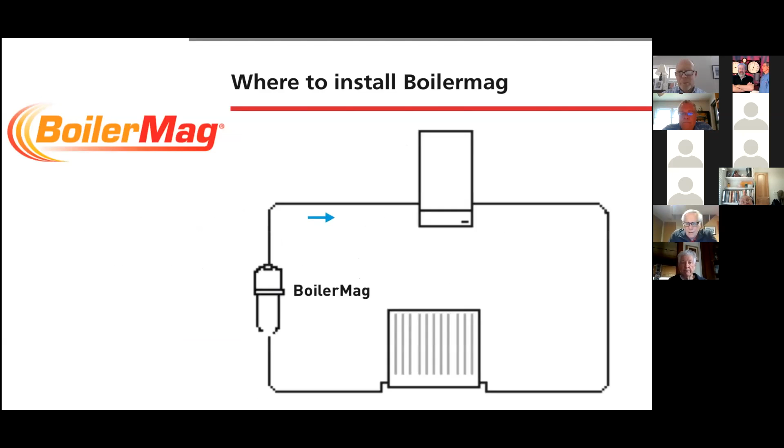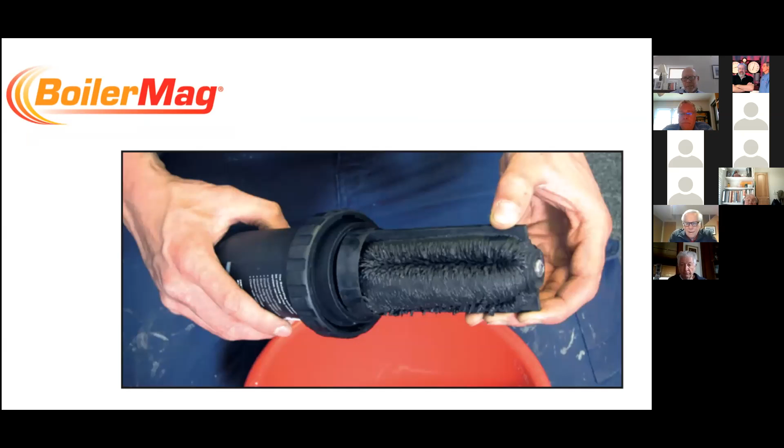Here's a look of a residential version, inline, showing it taken out, what it looks like being covered with the iron oxide. Some of the larger sizes, as you get into larger diameter pipe, are a little bigger.

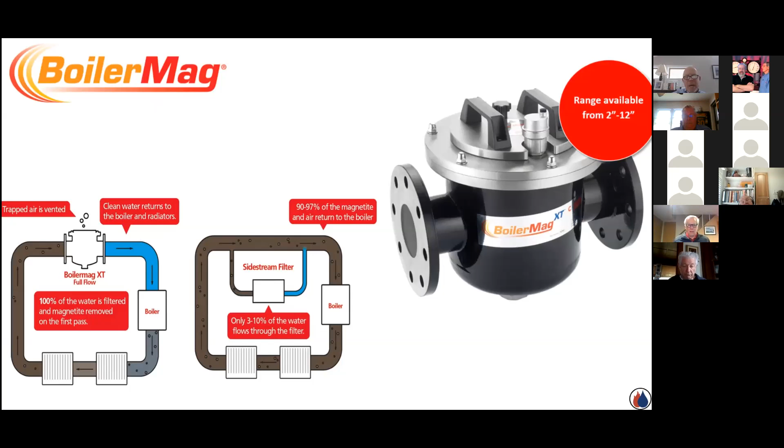Ideally, we want to go what they refer to as full flow, but sometimes economically it just can't—it doesn't make sense, the price is just too much. So they get into what they refer to as side stream or a bypass. That's okay—you're just not catching everything on the first pass, but over a period of time, all of that magnetic oxide, iron oxide, would pass through that magnetic separator.

It's kind of like the third leg of a stool: high efficiency boilers, modulating condensing; high efficiency circulators with intelligence on board, ECM pumps; and then the third part is water quality, or protecting your investment by using some type of magnetic separator.